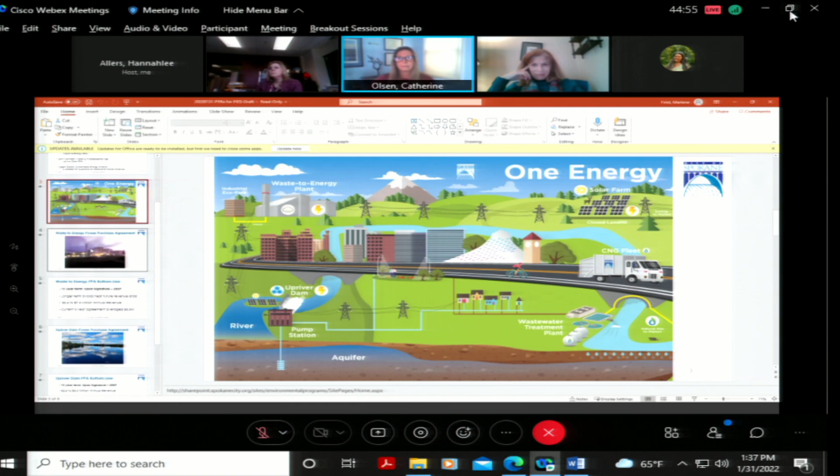With that bit of background, I'd like to turn it over to Chris Avert for his summary of the Waste to Energy Power Purchase Agreement. Thanks, Katie. As a refresher, the waste to energy facility utilizes energy within municipal solid waste and converts it to electricity. After deducting the power needed to operate the plant, the excess is currently sold to Avista through our current power purchase agreement, or PPA. The electricity sold to Avista from the facility is enough to power over 11,000 homes.

Next slide, please. Our current PPA is a 5-year agreement set to expire at the end of 2022. The energy market analysis conducted by Katie's team indicated high volatility in short-term agreements, leading to near-term revenue loss. The optimum revenue is generated by pursuing the maximum term agreement, which in our case is a 15-year PPA spanning from 2023 to 2037. The revenue generated during this agreement is projected to range from $5.6 to $7.5 million annually, compared to our 5-year agreement, which averaged $5.5 million. I'll now turn it over to Seth to provide an overview of the Upriver Dam agreement.

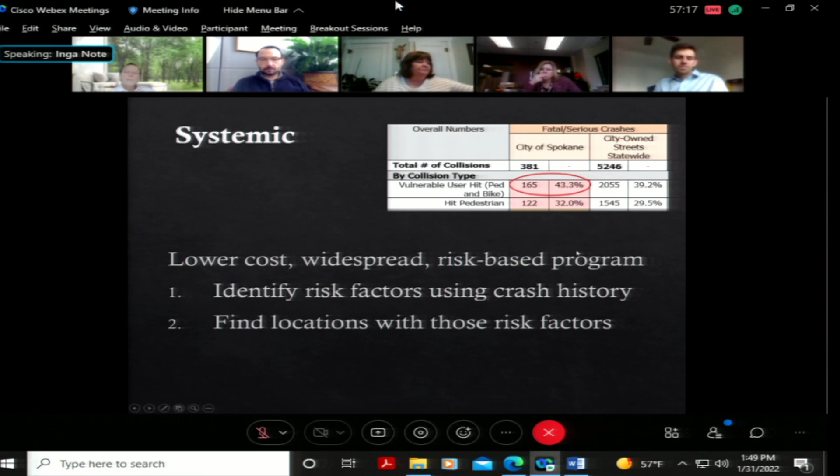We go through and look at those collision patterns and try to come up with risk factors, which are basically the characteristics of those locations. We find that we commonly get these types of collisions on arterials with uncontrolled crosswalks, crossing multiple lanes of traffic, usually with transit nearby or commercial land use. It's often a neighborhood with low vehicle ownership, with a school or park within a quarter mile, and in some cases it's on the bike plan map. That's how we go through and screen which ones we should look at.

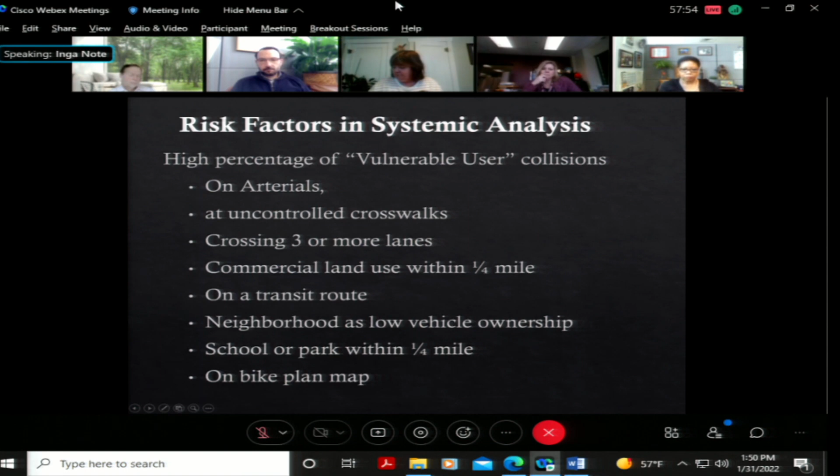I'm still going through and looking at some underlying issues on a couple of them, in particular 29th and Fisk, so I need to see if that could be resolved before we can move it forward, and just doing due diligence on all the other locations. But eventually, I'll need to whittle this down to a group of 3 or 4 of these locations, and we'll submit that as our systemic application. So it'll be similar to what we turned in and got funded on division in the last round.

And this is the timeline. We've been working on this for a few months, and we won't find out until fall which ones we get. Then design and construction will go through about 2023 to 2025. Any questions on this program?

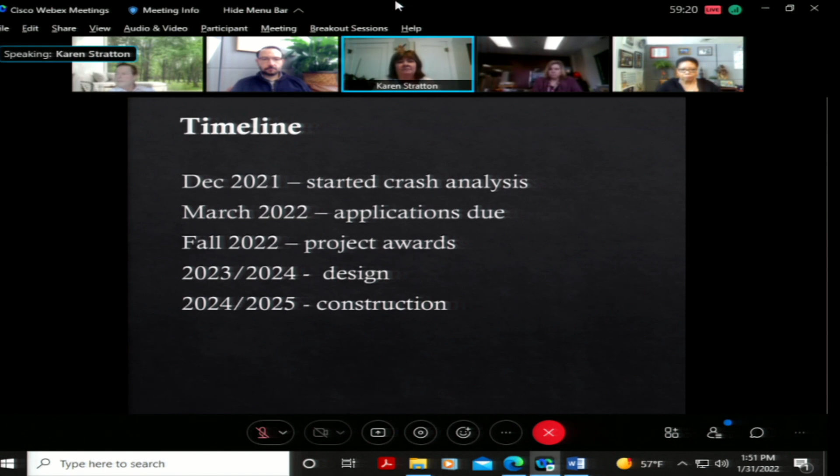Questions for council, from council? Go ahead, Councilmember Stratton. Thank you for doing all this work. I will say that we've gotten several calls regarding Whistalks Way and some of those areas around there that citizens deem dangerous. And there also, from what I understand, there's going to be some senior cottages developed out there. So thank you for taking a look at that area. Of course.

And if you could stop sharing, then I can see everybody, unless you've got more. I do not.

Okay. Anybody else have questions? Inga, that was good. It was informative. So I was not aware of all the data that needs to be collected in order to move that forward. So thank you for that. Appreciate it. Okay, Kevin, you're up next with 6-year street plan.

Actually, first I'm going to touch on a second grant opportunity, and then I'll touch on the 6-year street plan. Similar to what Inga just presented on, we have another grant opportunity. This one is a large one through Spokane Regional Transportation Council, their periodic call for projects. They do them roughly every 3 to 4 years. The last call for projects was back in 2018.

They're still finalizing some of their numbers, but looking at roughly $30 million available for our region, spread over 2024 through 2026. This is all federal funding through USDOT and FHWA, dollars that funnel down through WashDOT to SRTC as our local MPO. There's 5 different grant programs, or buckets of money, that'll fall under this call for projects, and they're doing a unified call, which is what they did back in 2018 as well. All the programs require at a minimum a 13.5% local match.

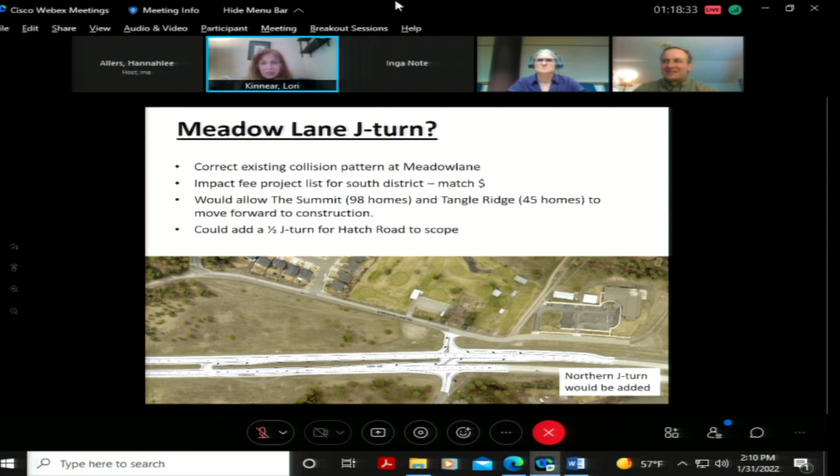Okay, Kevin, let's go on to the 6-year program. Remember, we've already touched on this, Council, so he's just doing a quick touch just to make sure we don't have any lingering questions.

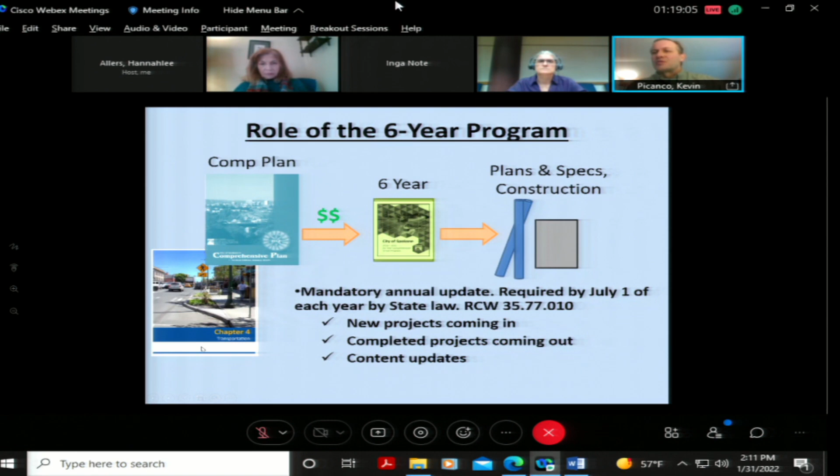Yes, thank you, I'll make this brief. We did have the kickoff kind of study session last week; this is the more official or formal kickoff, just giving the heads up that our program, that annual update, is starting. The 6-year program is where we implement the comprehensive plan goals, and we're required to do an annual update prior to July 1st. So that's why we're always a little bit earlier than the rest of the capital programs in the city.

Just a preview, my intent is to take a deeper dive into the discussion of new projects going into the program at our next study session, which is February 10th. But just a quick overview, there are 11 new projects on our draft list to go into the program. The bulk of those are a result of recent grant awards from grants that we applied for over the last couple of years that were awarded during 2021. Again, we can discuss those projects in more detail at the study session.

And then just big picture, our overall 6-year program update schedule. Highlighted bullets are the touch points with City Council. In between, we have 3 touches each with PCTS and the Plan Commission, ultimately leading to a hearing and council adoption of the program in June. So again, that's a quick touch. We definitely intend to dive deeper into the program at our next study session.

So any questions? I have a quick question, Kevin. It sounds like some of the times we put things on the 6-year plan so that we can then chase grant money, and then sometimes we put things on the 6-year plan after we get grant money, so we haven't put it on, but we do. I'm trying to figure out if there's any big picture logic of how projects go in, either way.

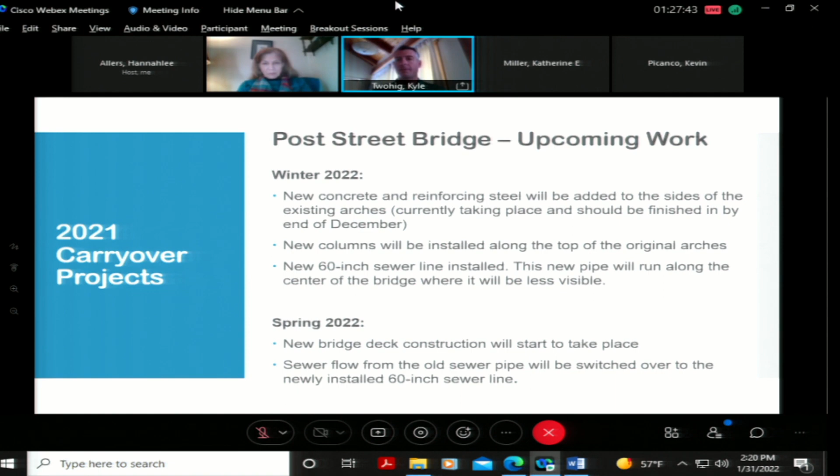We're just getting to the back end of the bolstering or reinforcement of the historic arches. Next, we'll be moving into that new 60-inch sewer line that's going to be installed on the bridge, and then we can start heading into bridge deck construction and divert the sewer flow over from the old line to the new one. So there you can see the work platforms and all that steel on the side of the bridge.

We're moving really fast on the landslide remediation. All the soil nails are in, and the retaining walls are around 60% completed down at the base of the hill.

Once that's in place, we'll actually be digging in Clark Avenue, as we have a bunch of infrastructure as part of the South Gorge Trail project there, but we've made a ton of progress over the winter, and it's moving along very nicely. We'll get this whole thing wrapped up this spring.

The landslide is stable, the soil nails are in, and the wall and the remediation is finishing up here. We'll be done with the wall in February, so that puts us in a much better place moving forward into the year.

Here you can see this is during the soil nail installation and some of the protective erosion matting up on the hillside. That sewer line that was broken in the process is getting routed down as well, and it'll go out under the wall and connect into Clark Avenue.

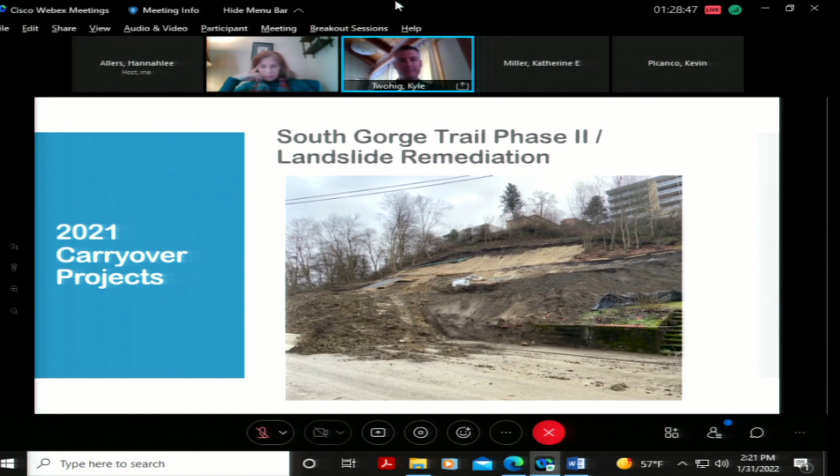Piece of the Cochran Stormwater project here through the golf course that was completed in the fall. We just have a bunch of restoration left to do. I'll talk much more about the Cochran Basin projects later in the presentation.

And then we've got a couple of small projects we're finishing up here. Most of these are parts delays.

All right, into 2022, we have another big year. It's about $20 million in ongoing work, that's mostly the Post Street Bridge. We're going to put another $80 million roughly out in new construction. Some of the highlights would be Riverside, the Thor Freya couplet, all the Cochran Basin projects, and a lot of asphalt maintenance. We also have a bunch of ped improvements too. I'll have them all listed at the end here.

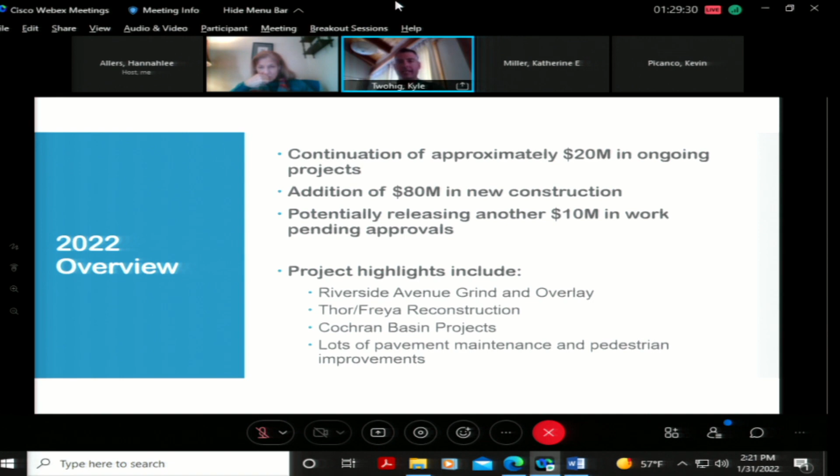On the big street projects here, here's a list of some of the bigger ones. A couple of reconstructions, but it's mostly a lot of grind and overlay work. We've got 2 years worth of our unpaved roads program coming out this year, and then our typical chip seals and some grind and overlays.

The big Thor Freya project goes from Hartson to Sprague. It's going to be a monster, a full rebuild. We're putting it back in concrete, and it's definitely going to be impactful as we move everybody from one side to the other.

The 2nd and 3rd Avenue intersections get postponed until next year, as there was some coordination with the NSC that had to take place. So those kind of got pulled out of the project, and we'll complete those next year.

The street out there is in really bad disrepair. Even some of it doesn't look too bad, that's because we actually put a skin of asphalt on them, like a little micro overlay a few years back, just to hold them together until we could get to this project. But the structure's completely blown out. What's great is once we get through the challenge of this year, that street will be in concrete, and we shouldn't have to touch it again in our lifetimes. Well, at least not rebuild it. We might do a little bit of maintenance.

Riverside Avenue Grind and Overlay, that's our big downtown project. The full limits go from Monroe all the way to Division, but really the construction part is just Wall to Division. We're restriping it to a 3-lane section and putting in bike lanes, and that is the full Monroe to Division. So that Monroe to Wall area is just a restriping project, and Wall to Division is a rebuild. We do have a full water main to do throughout that, and we're building STA stops. We're doing the ones on the south side of the street, and STA is doing the Central City Line ones on the north side.

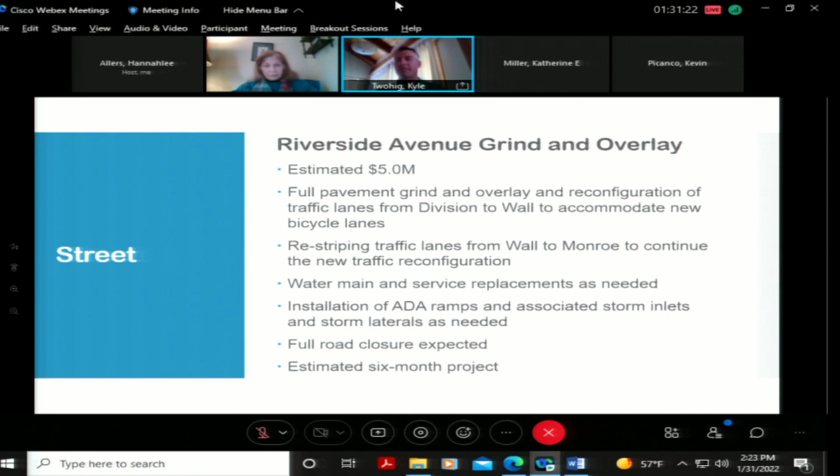That's because they were federally funded, and we didn't want to get that into the mix of this project here. So they're finishing out, they started in the fall.

They're finishing up this spring, and then we'll come in right in May. The street, as you've seen out there, is in very rough condition. It'll be good to get a new surface on that, replace an early 1900s water main, and then put in that change from that 4-lane section to the new 3-lane.

Here's a rendering of what it is going to look like. There's a little too much green paint on this. That's mostly going to be focused where the pedestrian and vehicle conflict areas are. Sorry, bike and vehicle conflict areas are.

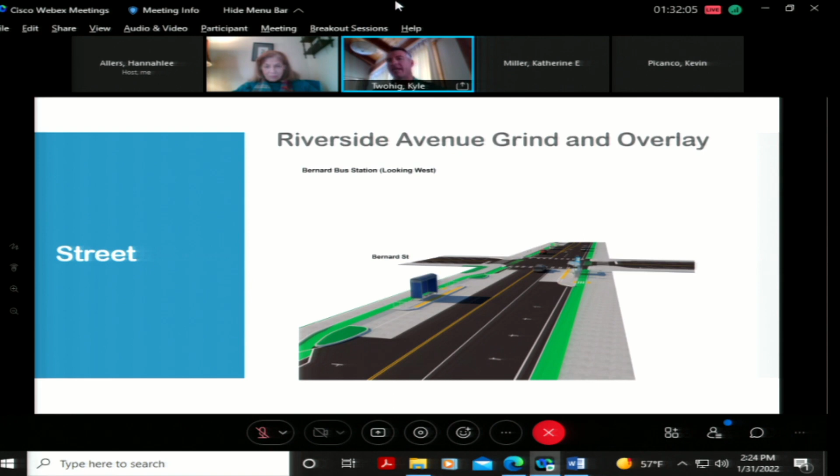We're not going to actually have green the whole run of it, but there will be a lot of green paint out there. One of the other cool things about it is the bike lanes go behind the STA stops, which was something that came out of the whole scoping exercise here for additional protection to get around the bus loading areas. That's kind of a street level rendering of what it might look like.

Again, I don't want to sell too much green out there, but there will be a good amount of green paint, particularly where we have chances of conflict.

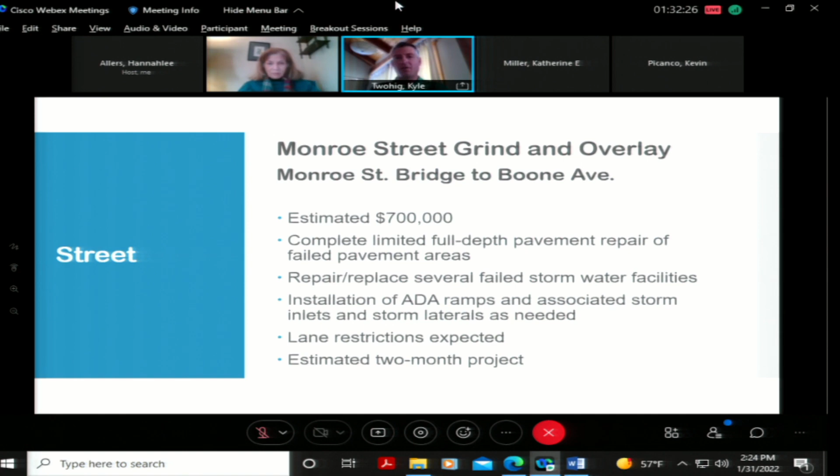We've got a grind and overlay on Monroe Street. Avista has been out doing some advanced work with that this past year. This is a standard grind and overlay out there from Boone to the bridge. Road just needs some TLC out there.

The Wellesley Market intersection, this is a big project with the NSC. We're taking that out to 5 lanes, doing some slip lanes to the area related to the freeway, and putting it into concrete as well with some signal modifications.

So this is that area out there, so you can start seeing the bigger turn pockets, that 5-lane section, and you see those slip lanes off of Market, both onto and off of Wellesley, where the on-ramps will be.

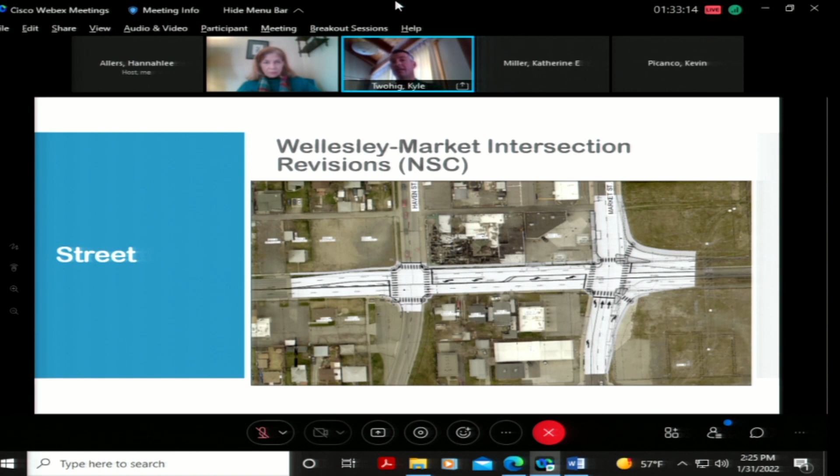And the whole intersection gets lowered because it's got to connect with the new elevation. They had to lower the whole area of Wellesley underneath the new railroad bridge. The railroad bridge is rebuilt, but at the same height, so everything underneath it goes down to create better clearance and a safer area out there.

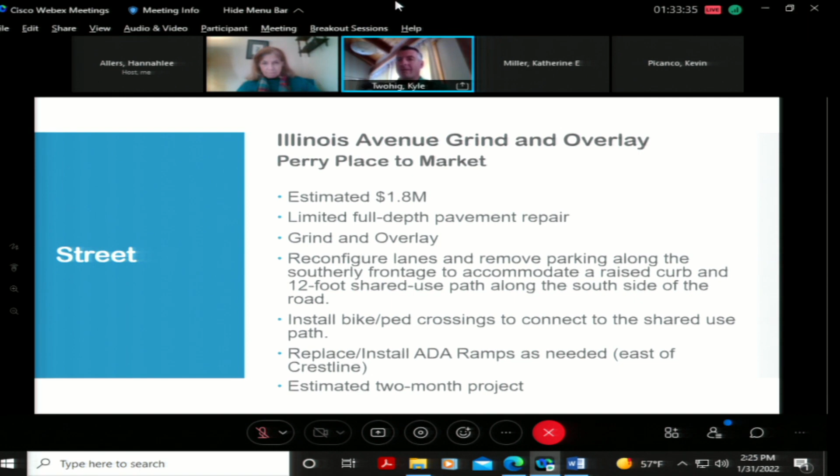The Illinois Grind and Overlay, so that is just a pavement project, but it's got all that really cool stuff. I think you've heard Kevin talk about it this winter, where we'll be putting in that new 12-foot shared use path based on all that great community engagement the capital team did. And it's going to be a raised curb separating all that while also removing the parking on the side.

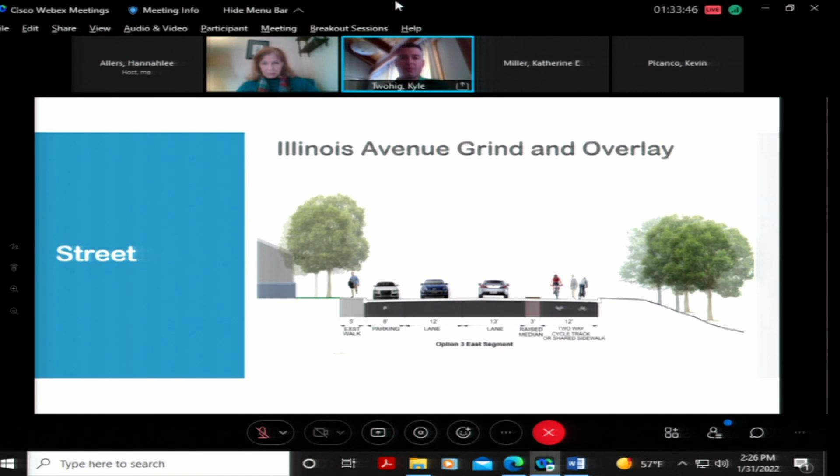I've got a good rendering of that. This is a section where you can see that two-way cycle track, 12-foot, 3-foot raised median, but we keep the parking on the whole side. This is Illinois, basically above Avista and running the whole length out there.

And it's going to be, I think, a really, really cool addition. This is such a cool area. We're still looking for opportunities to add some additional greenscape, but we know this project is going to be moving forward.

This is— hey, Kyle. Yes, sir. Can I interrupt you real quick? Absolutely. Do you know where we landed on those outlooks on Illinois, and then do you know when the Illinois project will likely be completed? I think no and yes.

Where we landed on the outlooks, I think that is still in—I don't know the status of that, frankly. We know where we're moving with the street project here, and we're planning on delivering it this year. It'll be a late season project. My team hasn't picked it up yet, and I do believe the outlooks themselves are still a discussion with the capital team. I don't know exactly where they are. If Kevin or Catherine have an update on that, they might still be on. Otherwise, we can get back to you on that. Okay, thank you.

Looks like Kevin's right there. Yeah, I think we're waiting on a council decision on whether to fund the overlooks or not, whether it be through traffic calming dollars or otherwise. But can you fund them at a different time? So can you design them and then fund them later? Yes, they could. They don't have to get built with this project. What set it up such that they could be built at a later date if needed. Yeah, and I'd run some irrigation and stuff out to them just in case, sort of whatever we wanted to plant out there. So those types of things we can do if that is a future state thing. Yep.

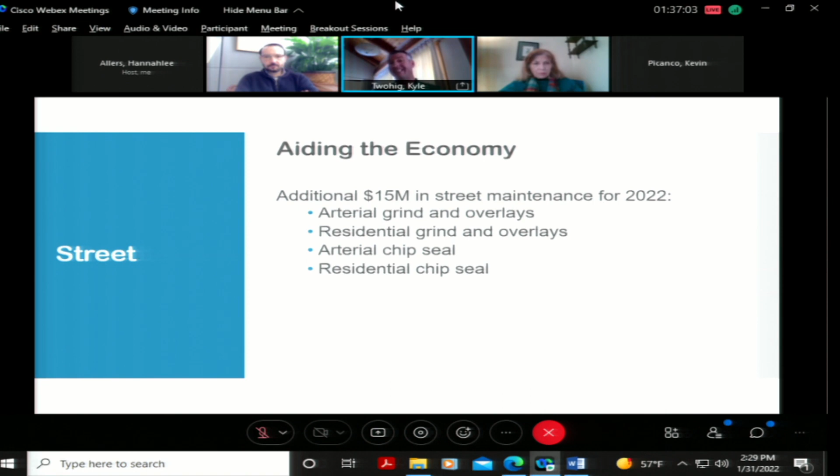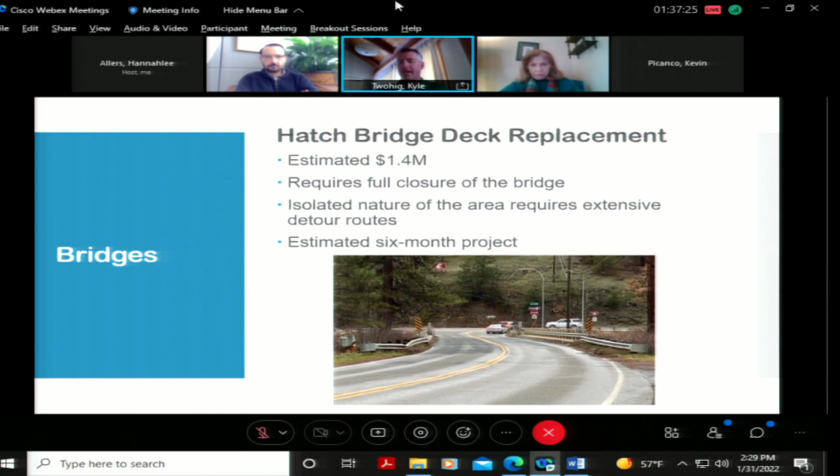When we get into bridges, we have a couple of bridge projects this year. The Hatch Bridge deck replacement - this is just a deck replacement. The structure's in good shape, but we do have to close the bridge in order to rebuild this deck. We are going to be able to put in a little bit more of a slip lane for folks headed northbound towards town, but otherwise it's just a redecking project.

Now we get into what's near and dear to my heart, which is the Cochran Basin. For those who haven't been around - most of us have - Cochran Basin has been a topic of discussion for many years. For those of us really pushing hard on the CSO program, Cochran was always kind of dreamt as a big part of it when thinking about cleaning up our river. It just took us a lot longer to get the funding put together. I want to say we have about 6 combined projects, maybe 7, and 11 different funding sources we put together to control all this untreated flow that currently goes directly to the Spokane River.

Now, this is separated stormwater - it's not combined sewer and stormwater, but it isn't getting an appropriate level of treatment before going straight to the river. So here's kind of the broader map of it all.

We've got most of the piping coming in right there at that Northwest Boulevard, TJ Meenach area. A lot of this is going to get conveyed down to where the current disc golf course is - that'll be one of the next projects to come out this year. We already did that golf course conveyance project, and the Cleveland project has already been awarded. So we'll be coming out with the TJ Meenach component.

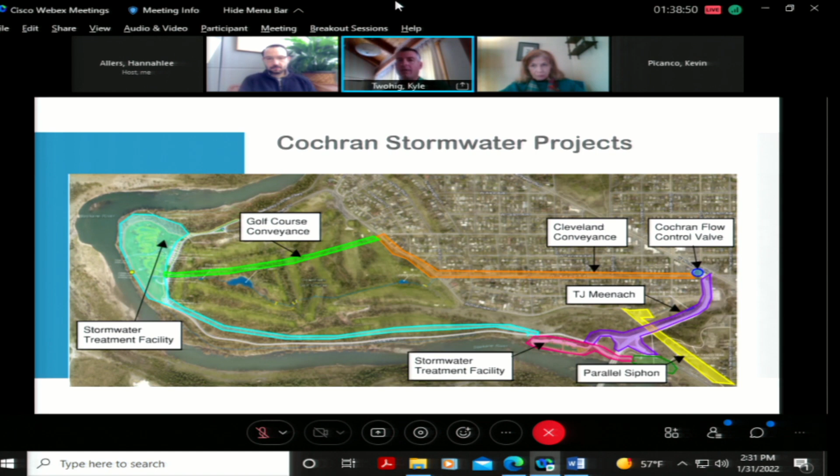We're replacing a siphon and then 2 big stormwater treatment facilities. This is going to take all that water that would normally go directly to the river and make sure it goes through proper infiltration and treatment before recharging basically the river and the aquifer in the same zone. So it's a really, really great environmental impact here.

We'll have a couple of improvements to the recreational access and the parking. We will be rebuilding that disc golf course with the aid of a professional disc golf designer, and just trying to make those access points a little bit better, and again, really get that great environmental benefit.

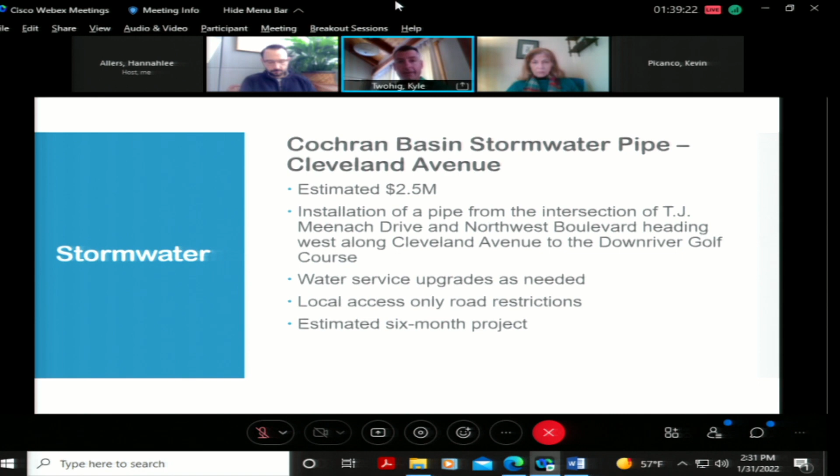So this is the Cleveland Avenue portion of the pipe. This has already been awarded and will be going right away this spring. That's the yellow line, or orange line, whichever level of color blindness you're at - I can't tell on this map right there.

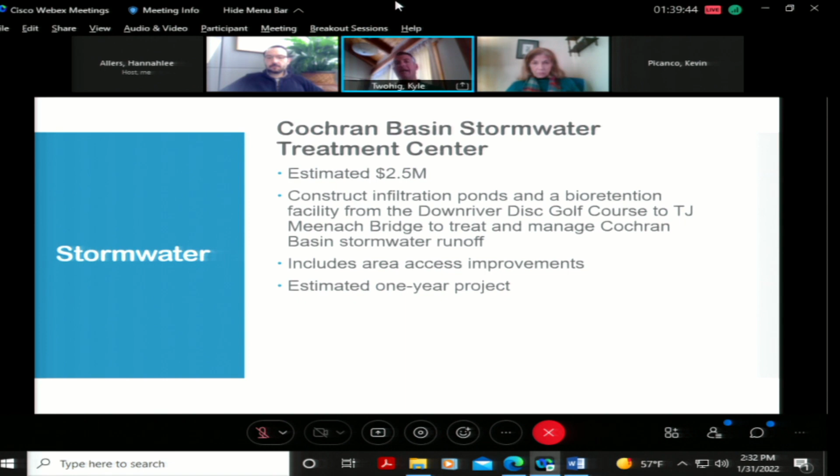The treatment facilities - that's both the disc golf course and a big treatment facility on the downstream side of the TJ Meenach Bridge. There's a parking lot there; we'll be rebuilding that and putting in a big infiltration facility. So you can kind of see those 2 facilities - we're going to put them together as a single package. One's a net fill, one's import, one's export, so it'll help balance things out.

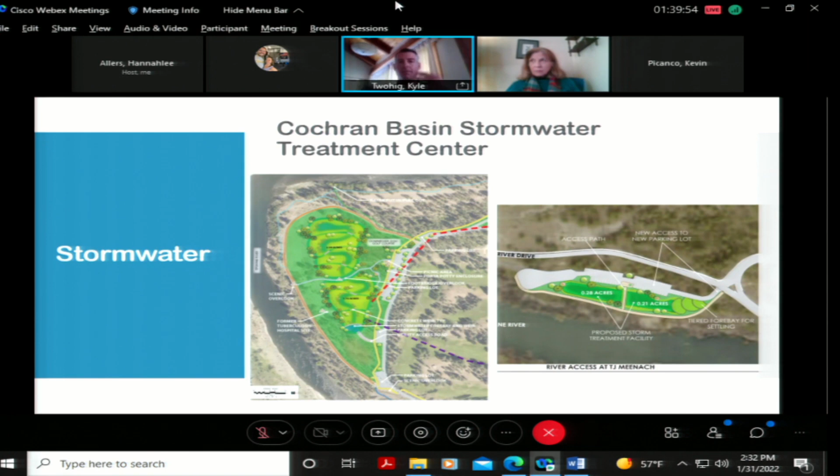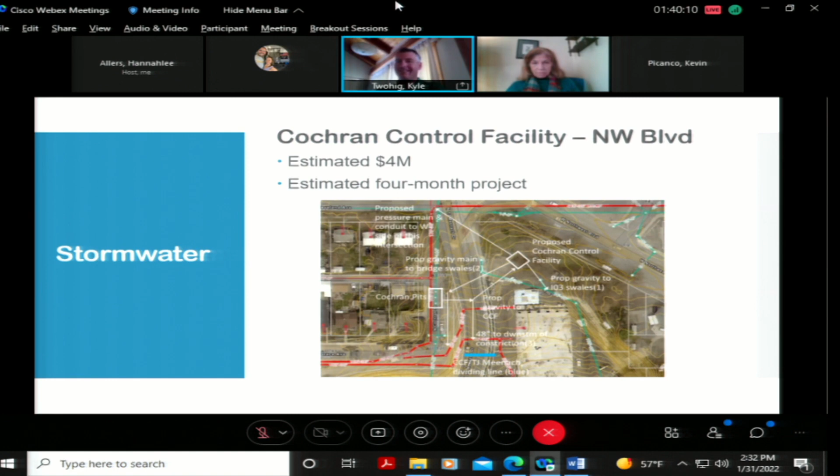We've got a control facility up there near IO3, which was a big tank we installed for the CSO system. We're going to put a small control facility up there. That'll also be going in late this year, potentially starting then.

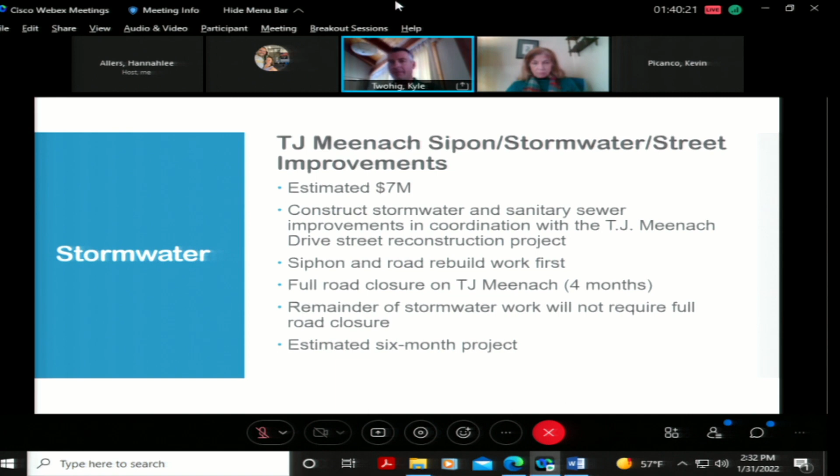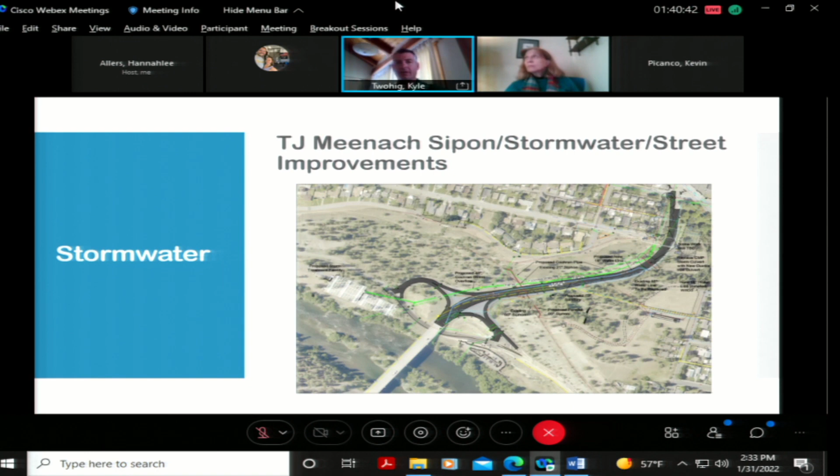And then the TJ Meenach actual street project, which has a lot of piping in it, pretty much everything under the sun, that's going to be going throughout this whole year. This is another grant-funded project. It's got the 48-inch stormwater overflow, and we're building a siphon adjacent to it—we just approved the material pre-order. It's a 60-inch siphon that connects our interceptor across the hillside, plus some infiltration facilities and a new pedestrian facility on the side.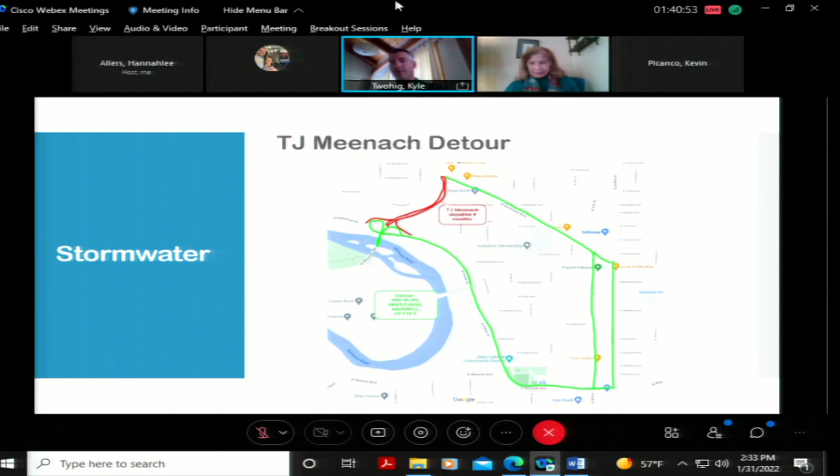This is just that quick little detour. We'll take people up Pettit Drive over to Maple and Ash because TJ Meenach is going to be closed for a lot of the year.

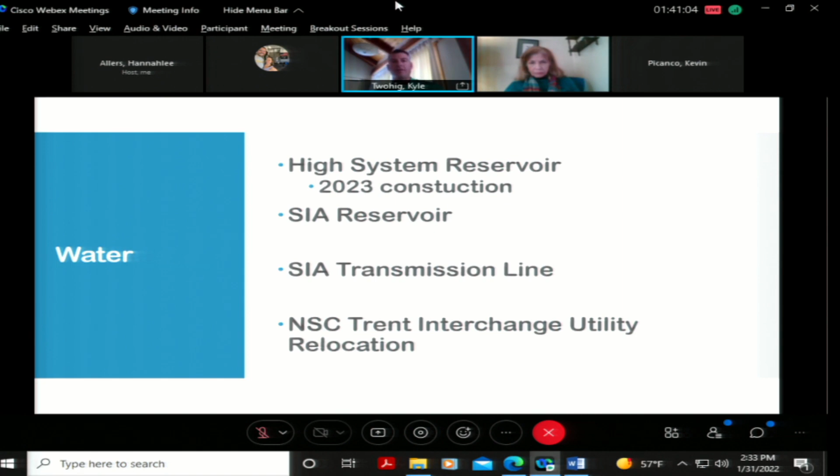We have several water projects going. The high system on the South Hill we've been talking about, we're going to end up waiting until 2023 on that one, but we will be building that reservoir out at the airport, some transmission lines, some stuff over for the NSC near Trent, as well as the Havana well pump station, which is our new well down at 6th and Havana, and rehabbing the Hoffman well.

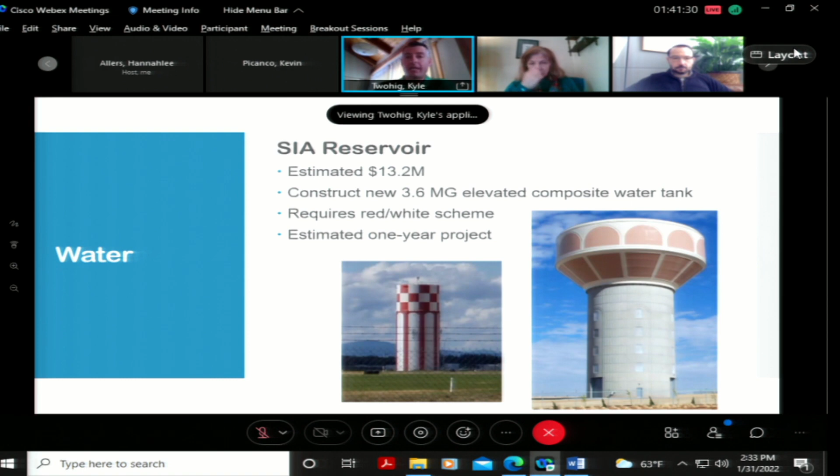That SIA reservoir is a big elevated tank. It's going to look like that picture on the right, but it'll be painted like the Purina can on the left. That's going to get started right away this spring. It's going to be one of the larger elevated tanks in our system. We've got a transmission line that'll connect this new Plains System booster station to that tank, and then the booster station itself.

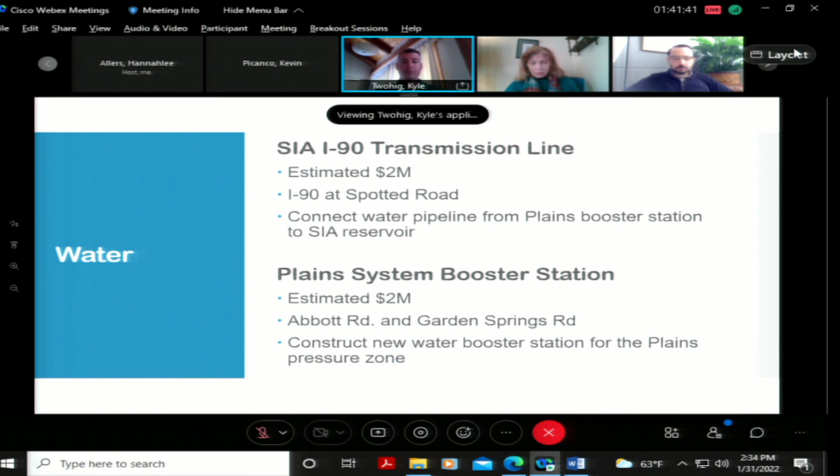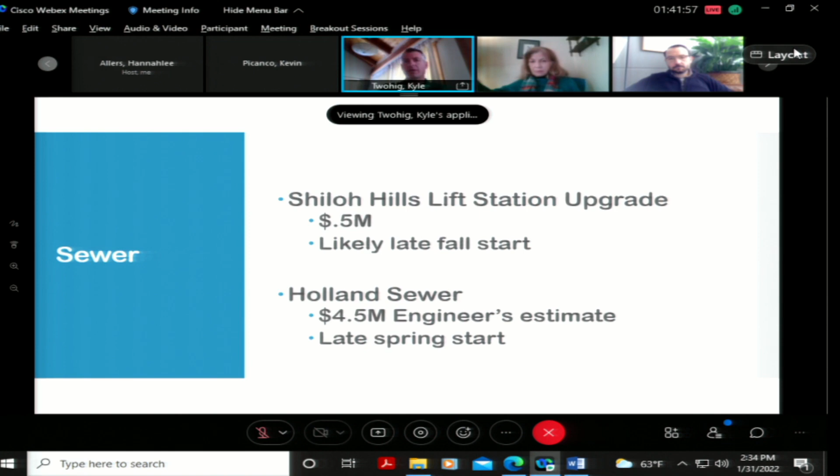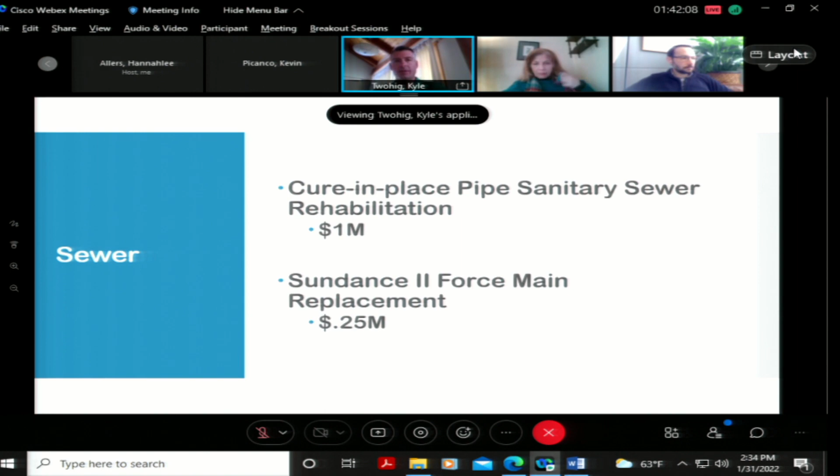And a couple of sanitary sewer projects, a lift station upgrade. This Holland Sewer project actually gets rid of a lift station for us. We're very excited about that—we've had a really challenging time with that lift station, and rather than replace it, we're working on a deal with the county so we can key into their gravity lines and get rid of ours. We will also do some pipe rehabilitation with the CIPP project and some force main replacement up on Sundance.

And pedestrian safety projects: we've got the sidewalk on North River Drive. We awarded that late last year, didn't have time to get it done, so we'll get that out this year. That's the piece of sidewalk connecting from Division right to the new entry to Riverfront Park. Streets is also going to improve the pavement out there.

And we have a laundry list of school pedestrian safety projects—traffic calming, school safety, the Division hybrid beacons. And then these last five or so, Ingrid had touched on, we got via a late grant cycle at the end of the biennium for additional pedestrian hybrid beacons, pathways, sidewalks, and more.

So a lot of this work will come out late, especially those last few projects, because we're a little behind the timeline on those, but we'll get them all done and meet our grant deadline. If there's any additional information you need, you can always reach out to me, and I'll find it and get it wrapped up for you.

Any questions? Wow, that was amazing. You just zipped right through that. Questions from council? Anybody? Great. That was overwhelming, so we're still kind of processing that. Thank you, appreciate it. If you have further questions for Kyle or Katherine, please ask them offline, and if you get information you think would be beneficial to the rest of the council, please copy some of us on it. So thank you, Kyle.

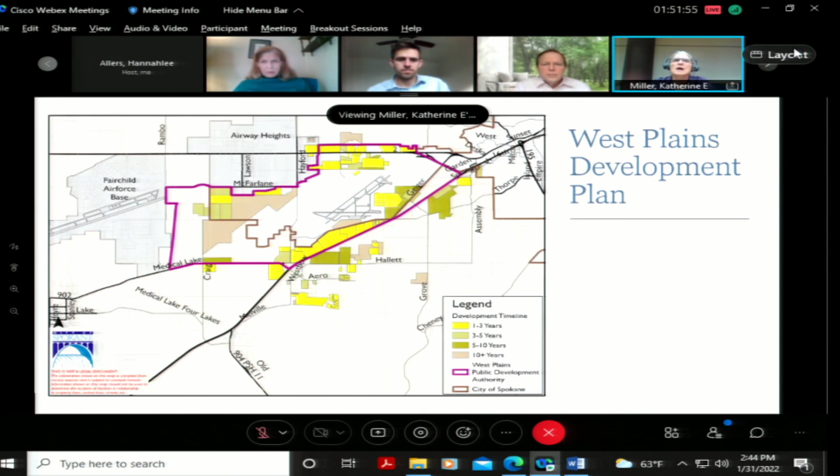In West Plains, we were highlighting the PDA authority boundaries, which encompass entirely the city of Spokane and also include a portion of Spokane County. So from our perspective, it's our entire city out there. We also showed them that the future build-out is pretty extensive in terms of acreage over the next 5-10 years plus. I shared with them our retail service area—that's where properties within the area have the ability to obtain water service from the city of Spokane without any additional process, since the retail area has already been established.

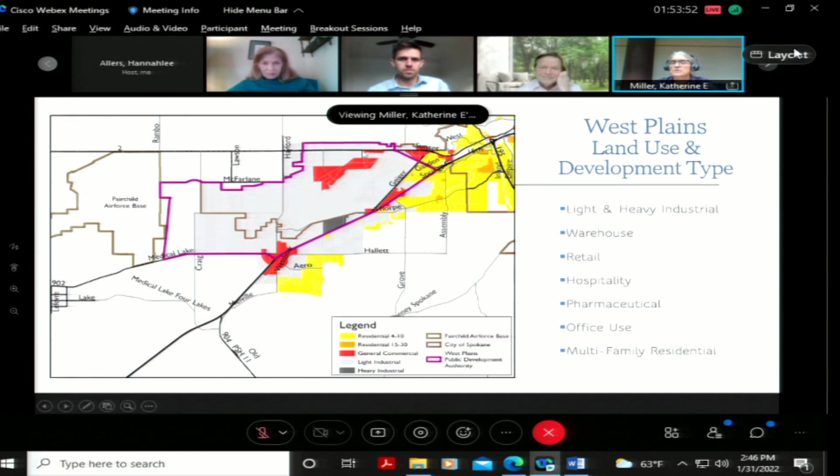We also reflected back to them the types of land use we have out there. Council has seen over the last couple of years requests for changing land use designations from industrial, shown in gray, to more general commercial. We're seeing a lot of activity on Highway 2, with requests over time to flex that industrial into commercial as the area builds out. This image was to reflect that we have a 50-year planning horizon—6 years for implementation, 20 years for facility planning—but we have pipes made of ductile iron that last over 100 years. So there's a lot that will likely happen in the next 50 years.

I needed to stop with the PDA and just give a quick one-oh-one on what typical developers are required to do, and the PDA is effectively acting as a developer in the sense that their desire is to have as much property ready for development in that turnkey scenario.

Reminding them, when we talk about requirements for development, developers are really required to do a lot of the infrastructure, building three-quarters of the roadway when it's adjacent to their property, placing new water lines, booster stations and storage tanks. So if a developer came into the West Plains without the PDA, these are the things we were requiring individual developers to do as they go through.

One highlight here is, when we ask a developer to address a water or sewer issue, we can only ask them to deal with what their needs are. That's kind of a piecemeal approach when you're really trying, as a full PDA, to look holistically. That really came into what the PDA's mission is about.